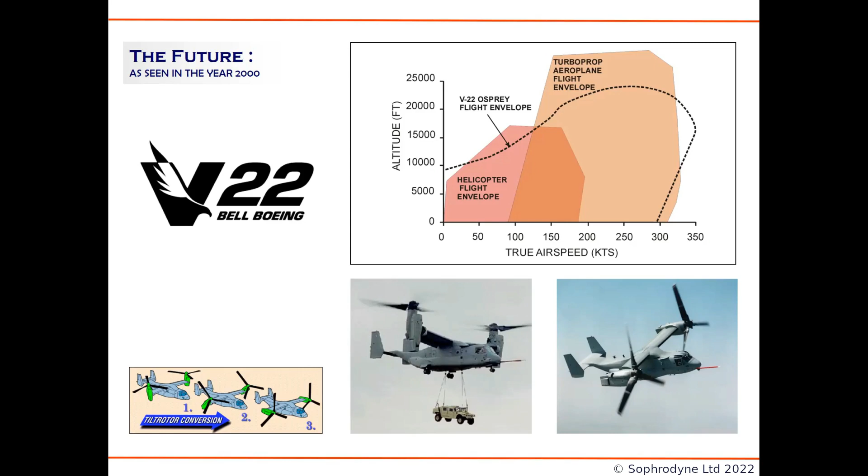Then in April 2000, on one very dark night near the small town of Marana in Arizona, 2 Marine Ospreys were simulating a tactical descent to a landing zone on the desert floor. There are several versions of what then happened. In one version, the pilot of the lead vehicle, realizing that his approach was too high, increased his descent rate beyond what had been trialed previously on the aircraft.

In another version of the same story, the pilot realized that he was going to overshoot the landing zone, and this is not a particularly uncommon phenomenon in night flying, especially with night vision goggles. He arrested the forward motion of the aircraft, unintentionally allowing its descent trajectory to become much steeper than he had intended. In any case, within seconds, the aircraft had flipped over on its back and crashed into the desert, killing all 19 Marines that happened to be on board that particular flight.

So within short order, an investigation panel was constituted to try to find out what had happened. This was not the first major accident that the V-22 had suffered, and speculation was rife within the rotorcraft community that this accident would be the final blow to the program.

The reason for this pessimistic outlook was that a rumor had begun to circulate that the aircraft was fatally beset by an old problem last encountered in the early days of helicopter flight, when most rotorcraft were smaller and lighter. This problem was thought to occur when the rotor of the helicopter would descend into its own wake, in the piloting parlance of the time, causing a catastrophic loss of thrust in a phenomenon called the Vortex Ring State.

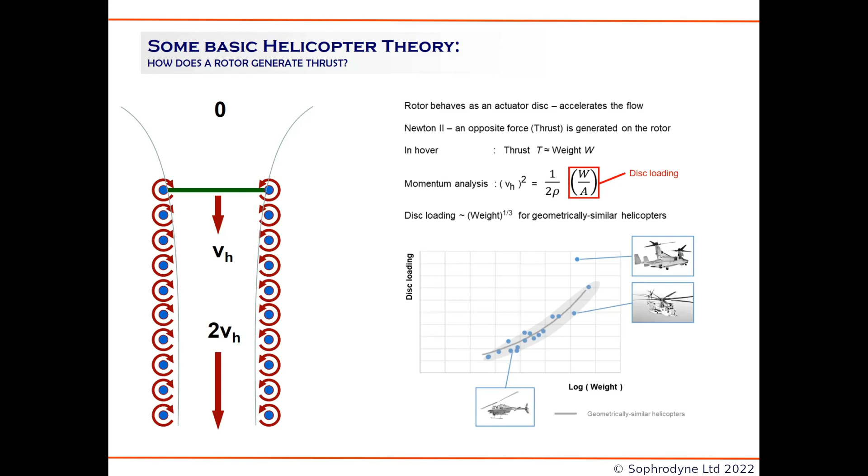Now you'll see something quite unusual already. Here's the V22, and here's where it sits on this graph. You can see that it's a heavy machine, but also that it has a disk loading that is rather high by conventional helicopter standards. So perhaps we can already see that there might have been something extraordinary about the V-22 that perhaps hadn't been quite appreciated during its original design when the aircraft's performance had been considered.

Another thing worth bringing to our attention, since I'll use this representation extensively, is how we represent a descending flight trajectory for a helicopter. This representation on the left perhaps seems the most intuitive: we plot altitude on the vertical axis and distance on the horizontal axis. The helicopter might start in steady level flight, before accelerating into descent, perhaps reaching a steady descent rate, then slowing down to a stop in hover before settling onto the ground.

For aerodynamic reasons, that's not a particularly effective way of representing a descending flight trajectory. We don't expect the physics of the vortex ring state to be much influenced by where the helicopter is in the sky, but rather by its speed relative to the air through which it is flying.

So instead we tend to represent a descending flight trajectory using this form on the right. To get from one representation to the other, we differentiate the aircraft's trajectory with respect to time, so rate of change of distance becomes the forward speed of the helicopter, and rate of change of altitude becomes the rate of descent of the aircraft. Then if I replot the blue trajectory on these new axes as the red curve over here...

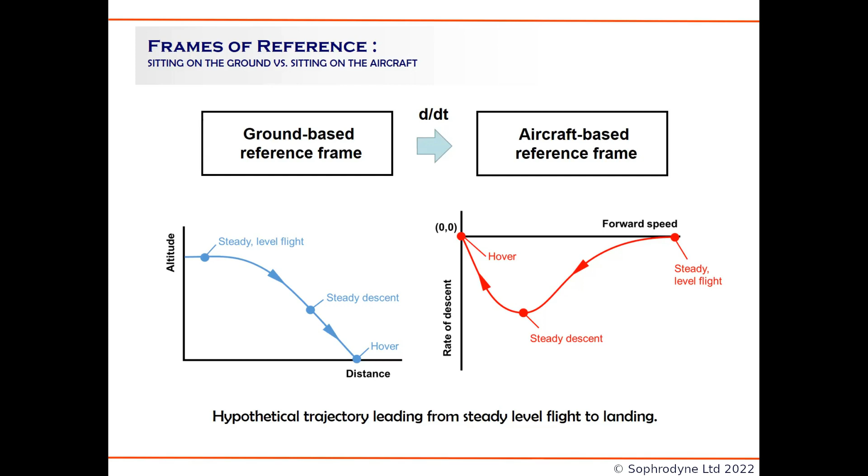You can see that we may start off in steady level flight on the horizontal axis. We'll accelerate into descent, reach a steady descent condition, and then decelerate back into hover. Hover, very conveniently, is the origin on this set of axes. Bear this representation in mind, because we will use it extensively in the slides to come.

So where are we going with all this? In the course of this presentation I'm hoping to do three different things. First, I'll talk about the vortex ring state as an operational issue, how the pilot actually experiences the phenomenon. Then I'm going to spend quite a bit of time talking about our theoretical understanding of the vortex ring state.

I'm going to show how the classical piloting description of the vortex ring state, as descending into the rotor wake, is deficient to the point of being wrong, and then proceed through a series of logical steps to introduce a more sophisticated view of the onset of the vortex ring state that is more consistent with the physics as we understand it. Using this more nuanced description, I'll then show the practical consequences for the next generation of rotorcraft, many of which have characteristics likely to make their behavior in the vortex ring state very similar to that of the V22.

So let me try to show you what the vortex ring state actually looks like from the pilot's perspective. Let's try to fly this trajectory: starting in steady level flight, accelerating into descent, trying to maintain a steady descent rate for a while, and then decelerating back into hover.

This video shows quite clearly what happens. Don't worry about the water spray added here to try to illustrate the behavior of the wake during the descent. That's not actually showing what the creators of the video would like us to believe it's showing, and is a bit of a red herring. What I'd like you to concentrate on is the trajectory of the aircraft as it descends along its flight path.

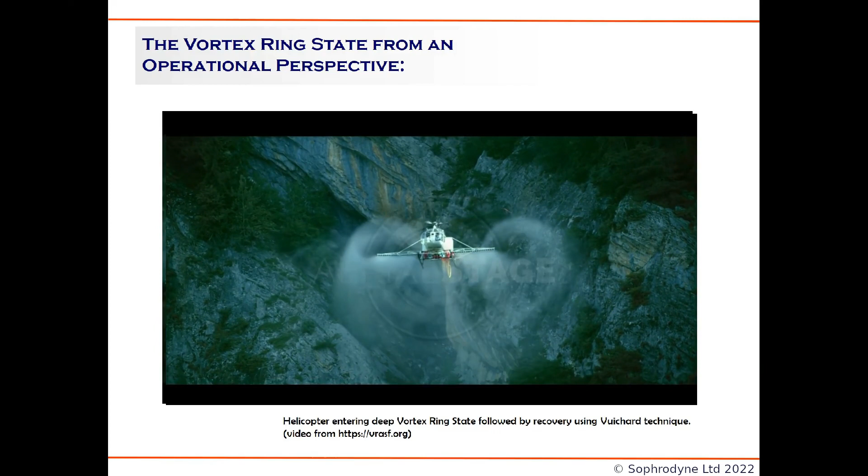Here we see the helicopter in steady level flight, more or less. The pilot puts it into a gentle descent and then starts to accelerate. At first the descent looks rather controlled, but soon matters get away from the pilot and the descent rate starts to look rather alarming. Eventually, the pilot takes corrective action and arrests the descent using a technique called the Vuichard maneuver, a very modern way of escaping vortex ring conditions.

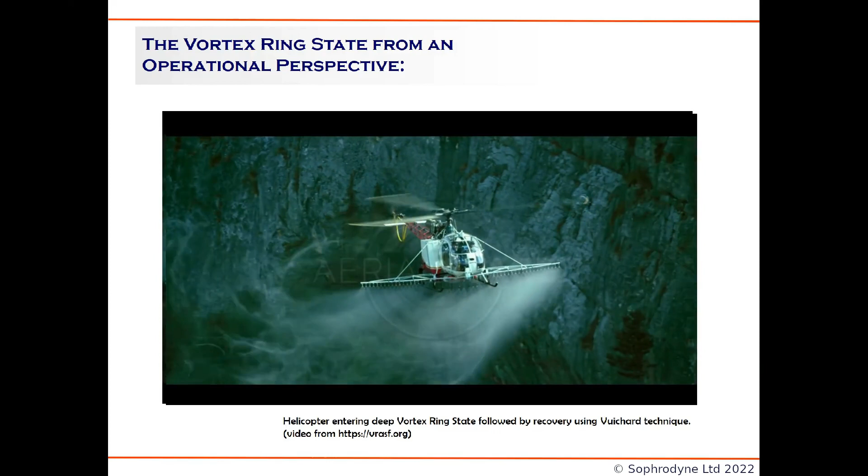The important thing to take away from this video is the very sudden increase in the descent rate that accompanies the onset of the vortex ring state.

I don't really want to present that sort of material here, but if you go to somewhere like YouTube, you'll find a handful of videos which show the helicopter not being able to escape the VRS before colliding with the ground, often with fatal consequences for the pilot and crew.

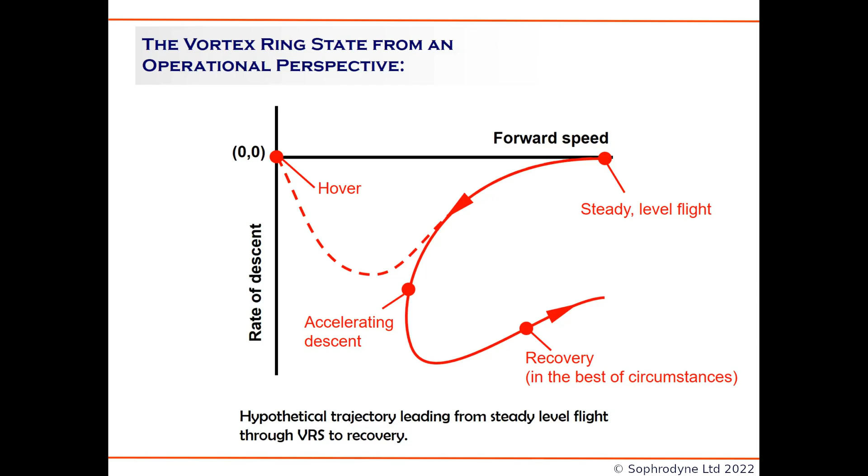So just to recap what happened in the video: the pilot was trying to fly this dotted trajectory, but what he ended up doing was flying this other trajectory, where at some point the descent rate started to increase, got away from the pilot for a while, until he managed to regain control and recover to some condition, perhaps with quite high forward speed or descent rate. This diagram shows the typical flight trajectory through the vortex ring state, where the pilot suddenly experiences this increase in descent rate that he wasn't anticipating.

Now, most of this presentation is going to be about what happens near this point over here. You can imagine that there might be a boundary somewhere here in the flight envelope that marks the onset of the vortex ring state.

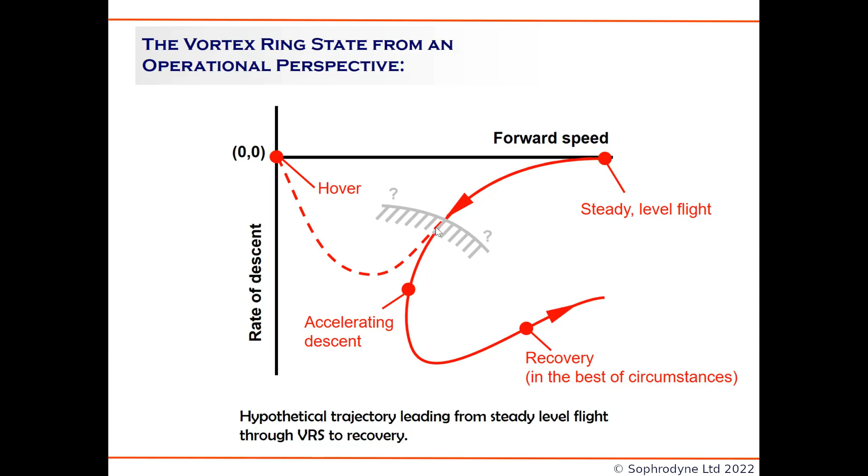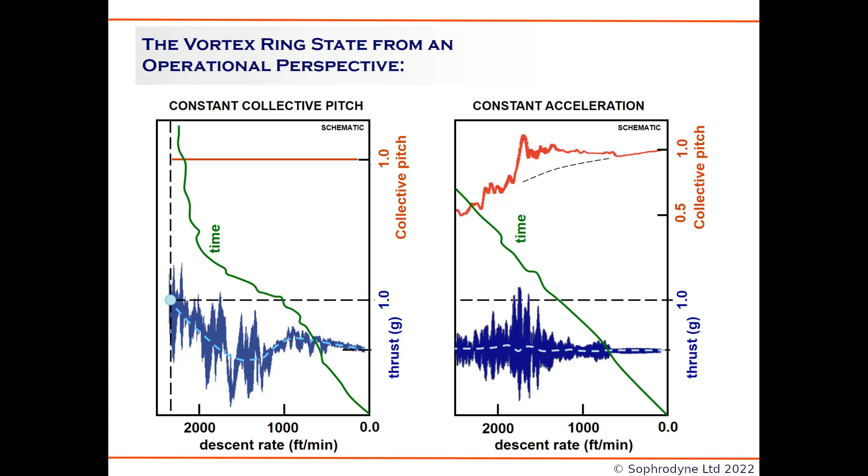What I've done in this figure is plot a pretty comprehensive range of the available experimental data showing where in the flight envelope, defined in terms of forward speed and rate of descent, these VRS-related thrust fluctuations are encountered. The experimental data goes all the way back to the 1940s, from the earliest flight test experiments through to the 1990s and Betzina's experiments on a model V22.

Now you'll see that something rather special is going on here. I'm not plotting forward speed and descent rate in conventional units, such as meters per second, knots, or feet per minute. Instead, I'm plotting the data on axes where forward speed and descent rate have both been non-dimensionalized.

by dividing through by the hover-induced velocity VH that I introduced on the second or third slide of this presentation. What becomes very apparent if we adopt this non-dimensional representation of the flight envelope is that all the data for the location of these VRS-related thrust fluctuations, independently of the experimental setup or the rotor involved, tends to cluster in the same part of the diagram. Now that's a crucial observation because it enables us to make an important theoretical advance.

In fact, this clustering of the data on the non-dimensionalized flight envelope suggests to us that the existence of the vortex ring state is a universal characteristic of all rotors. In other words, we won't find that some rotors are subject to one kind of vortex ring state and others to another kind, or not at all. Now let's try to formalize this.

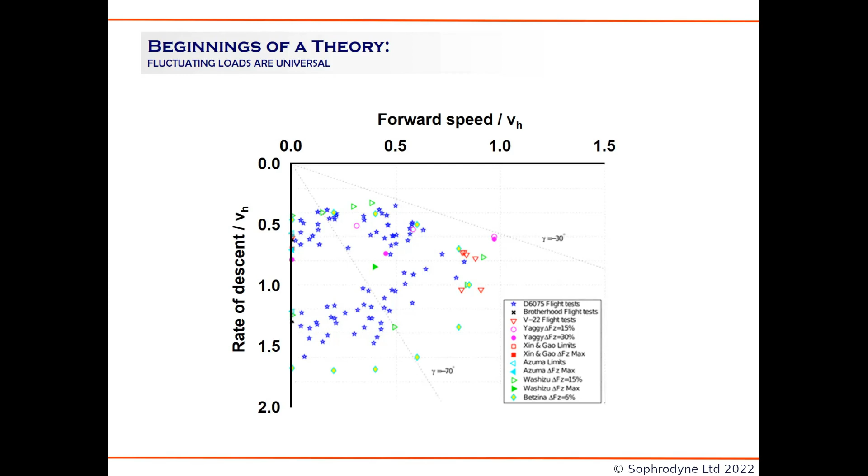Instead of presenting the VRS domain on this dimensional representation of the flight envelope, the data suggests that we should instead turn our attention to this non-dimensional representation, where we divide both forward speed and descent rate by the hover-induced velocity. Now here's where we exploit the equivalence between the hover-induced velocity and the disk loading that momentum theory gives us, which I introduced earlier in the presentation.

We can either non-dimensionalize using the hover-induced velocity or the square root of the disk loading. It doesn't matter, the result is the same. What this change of variables embodies, if you like, is the basic theoretical assumption that all rotors are subject to the same sort of vortex ring state, up to a scaling of the size of the region of the flight envelope affected by the VRS, by the hover-induced velocity, or equivalently by the square root of the disk loading.

If you accept the argument so far, then you realize also that details of the rotor design, parameters such as blade twist, blade tip shape, and perhaps the number of blades, must all have only a secondary influence on the character of the vortex ring state the rotor will be subjected to. So although we may need to consider the details of the rotor design to understand the subtleties of the VRS that a particular vehicle may encounter, this is secondary to the idea that the major characteristics of the VRS are determined principally by the disk loading of the rotor.

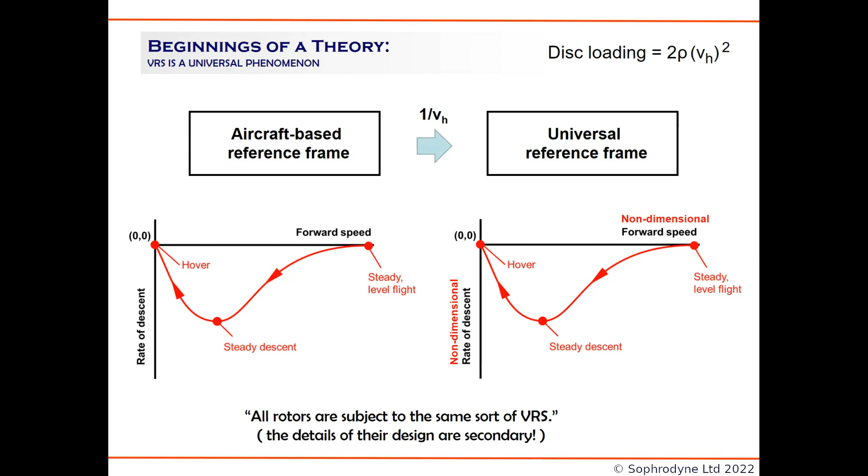Now, how is this used in practice? In terms of its operational relevance, this particular set of experimental data seems to have taken on a life of its own. In 1966, Washizu and Azuma at the University of Tokyo did experiments on a 1 meter diameter model rotor, and they mapped out comprehensively the region of the flight envelope subject to VRS-related thrust fluctuations. This figure shows their results presented as a contour map of the amplitude of the thrust fluctuations they were able to measure.

The data certainly supports the idea that the VRS is confined to a particular region of the flight envelope. Taking their results at face value, you might conclude that the vortex ring state will only be encountered if the helicopter is flying at a forward speed smaller than the hover-induced velocity and simultaneously descending at a rate somewhere between 0.5 and 1.5 times the hover-induced velocity. You can also see how those definitions may serve to give us our first rough and ready, crude and empirical definition of the VRS onset boundary.

Later on in this presentation, I'll show you that we can do very much better with a little theoretical input. Now, there is a danger in taking the arguments I've presented a little too far. For instance, Reynolds number effects may play quite a strong role in making the thrust fluctuations experienced by a model rotor a little more benign than is the case for a full-scale system. And certainly if you look in detail at the data I presented a slide ago, you'll see evidence of these second-order effects.

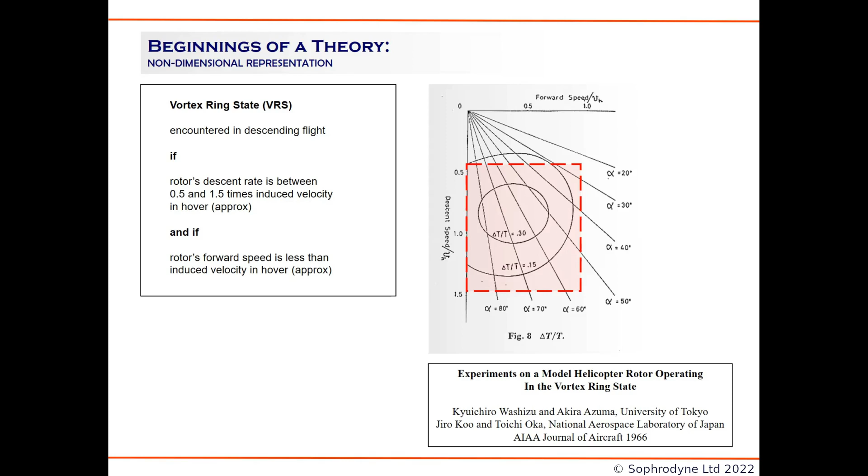The interesting thing is that Washizu and Azuma's data has propagated its way directly through into the flight manuals of many helicopters. If you're familiar with the flight manual of the CH-53E, you'll see a diagram which looks something like this. These contours, which demarcate the region of the flight envelope in which the aircraft might encounter the VRS, have more than a passing resemblance to Washizu and Azuma's curves. The important difference is that the units on the axes are real rather than non-dimensional. Washizu and Azuma's data has been scaled using the disk loading of the actual helicopter to give a diagram that is specific to the vehicle.

If you happen to be a US Navy pilot, the diagram will come with an additional boundary called the NATOPS boundary. You'll see this feature again when I present V22 data later in this presentation, and there'll be strict instructions not to fly below that NATOPS boundary. At low forward speed, flight is allowed in this low descent rate corridor. But as the forward speed increases, the corridor widens and the pilot is able to exploit a broader range of descent speeds.

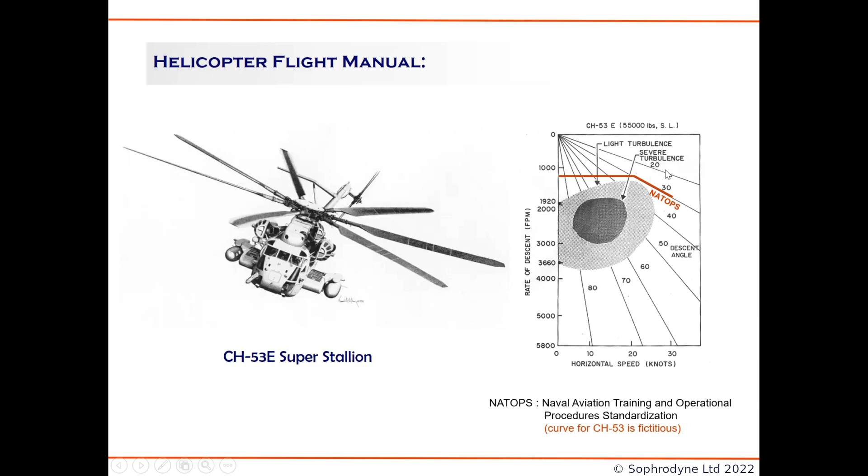Hence the persistent idea amongst some elements of the rotor community that the Vortex Ring State is not a particular problem for smaller aircraft. The data I'll present later in this presentation should dispel any complacency in this respect, however. It's the disk loading that matters, not the size or the weight of the vehicle. I'll return to this idea of universality of the Vortex Ring State later on in this presentation.

But for the moment, let's change direction a little.

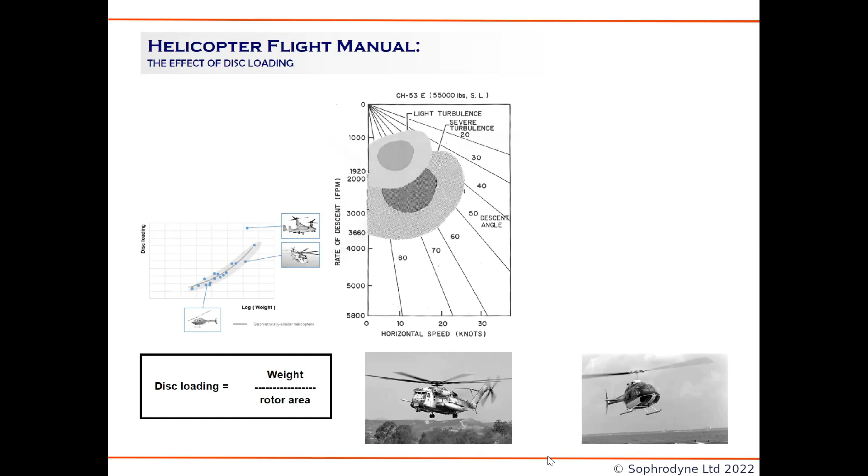Up to now, I've been talking quite extensively about the Vortex Ring State from an operational perspective. I've tried to give you a qualitative understanding of what the VRS looks like from the piloting point of view, and I've also shown you how the possibility of encountering the VRS might be represented within the flight manual of a particular helicopter. I've also begun to expose some quantitative aspects of the phenomenon, for instance, in terms of its dependence on the disc loading and its existence over a bounded range of flight speeds and descent rates. But the arguments so far have been largely heuristic and based on an analysis of experimental data. So in the next section of this presentation, I'd like to develop our theoretical understanding of the fluid mechanics that underlies the Vortex Ring State.

Now, let's say that we want to try to predict the thrust that is produced by the rotor when operating within the Vortex Ring State. Let's try to do that by going back to our original approach, where we related the acceleration of the flow through the rotor to the force that it produced. We can quite easily extend the analysis to the situation where the flow away from the rotor is not at rest, obtain a result for the induced velocity of the rotor, then use this to calculate the thrust.

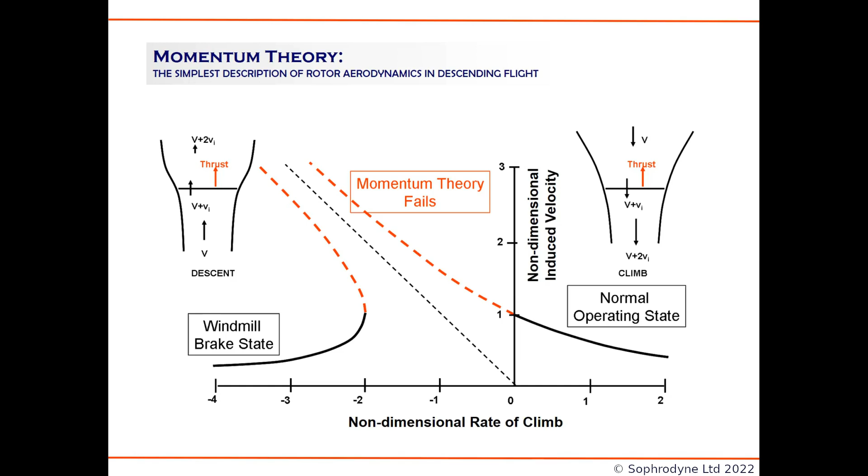So let's go back to experiment. Some very careful data gathering shows us that the mean thrust that the rotor generates when operating within the vortex ring state does seem to follow a consistent and repeatable relationship to the descent rate of the helicopter. Given what I've said so far about thrust fluctuations and the associated unsteadiness of the loads on the aircraft within the vortex ring state, this order within the chaos may come as a bit of a surprise.

What this suggests, of course, is that we should be able to find a deterministic, well-behaved relationship between the induced velocity and the descent rate of the helicopter that applies within the vortex ring state.

Now, this sort of result is again crucial because it shows us where we should perhaps focus our attention in trying to understand the physics of the vortex ring state. And up to this point, of course, I've not really said very much about the rotor wake, except perhaps for a few rather indirect references. It's time to rectify that.

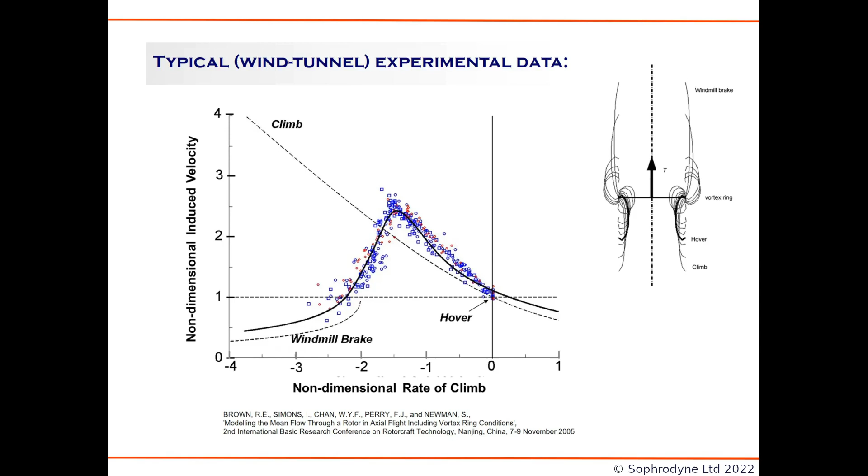Now, as the helicopter moves through the air, and because of the flow that is induced through the rotor by these vortices themselves, these tip vortices convect away from the rotor to form these essentially helical or spiral patterns in the air.

With the helicopter in forward flight, the mutual interference of these vortices can lead to a very complex but still inherently spiral wake structure. I'll say a lot more about this mutual interference between the vortices later.

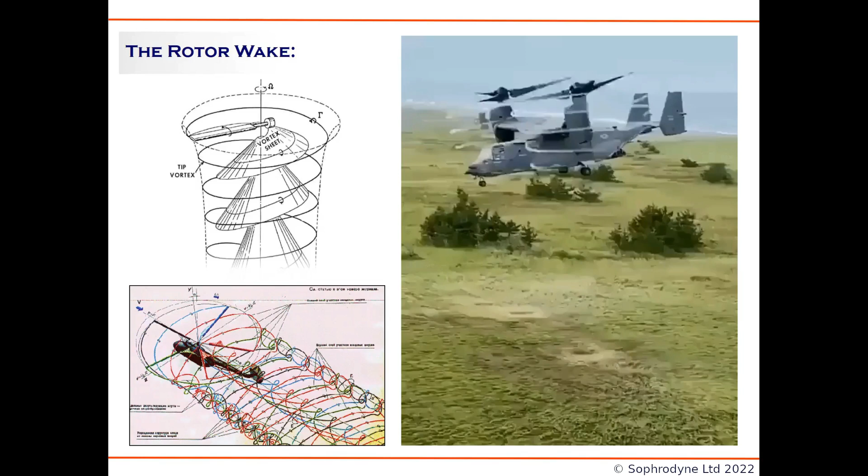Now, in terms of the influence of these vortices on the rotor, it's useful to think of them as the location of extremely intense and localized swirling motions within the airflow. So if the vortices get close to the rotor, their influence on the aerodynamics and the loads produced on the rotor blades becomes more pronounced.

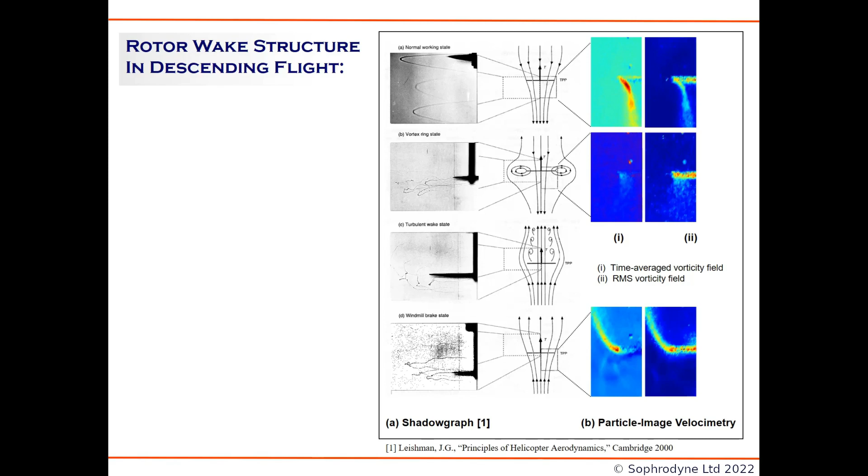Now, if you go to your average helicopter flight school, you'll very likely be given quite a simple explanation for why the VRS comes about. The usual way of describing things is that VRS occurs because the helicopter rotor descends into its own wake. In the next few slides, I'll try to put this explanation on a theoretical footing, but then I'll also show that in the light of available data, this idea is too simple, perhaps simplistic even.

Okay, so how does this simple explanation work in terms of the wake dynamics? Let's adopt yet another way of looking at the dynamics of the vehicle, this time together with the dynamics of the individual vortices within the rotor wake.

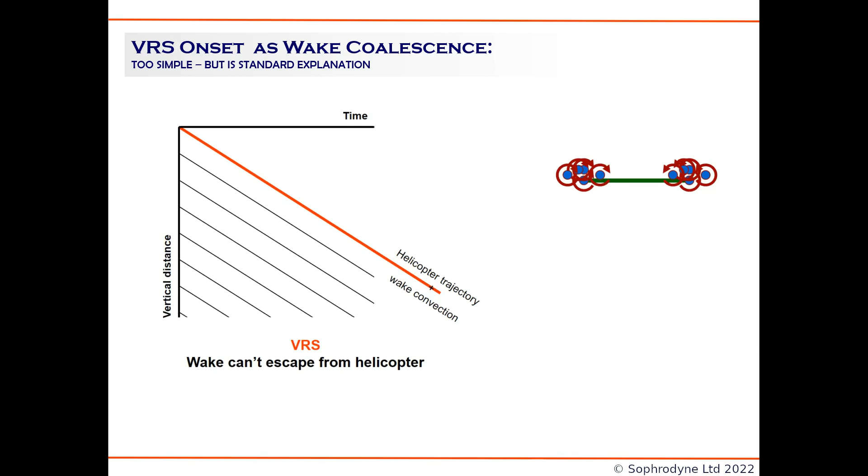So here we have the standard explanation of the origin of the vortex ring state. The helicopter descends into its own wake, and the effect of this vortex bundle is to destroy the ability of the rotor to generate appreciable thrust. Highly compelling, but unsubtle and not really supported by detailed analysis, as I'll shortly show.

So what happens if we increase the descent rate of the vehicle further, as I've shown in this diagram? Well, then the rotor can leave these vortices behind in the flow again, and the helicopter can escape its own wake, so to speak, and the rotor's encounter with the vortex ring state comes to an end.

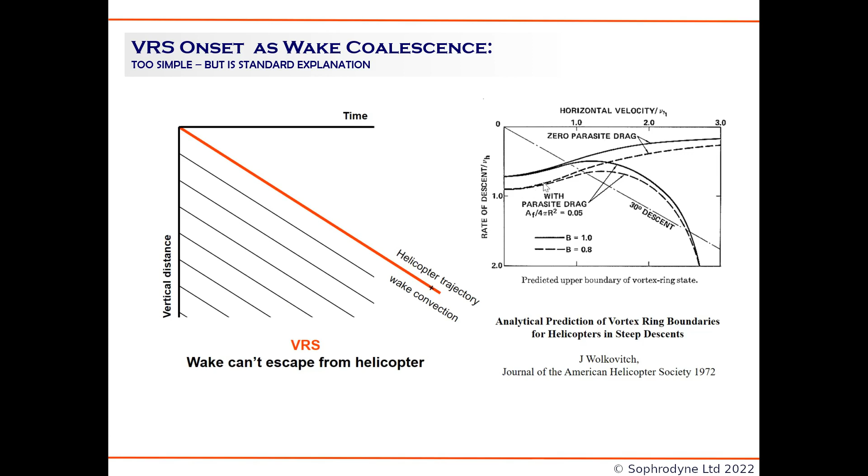Now, the interesting thing is that you can actually develop an analytical model for the location of the VRS onset boundary on the flight envelope based on this conception of the dynamics of the rotor wake. That was done by Wolkovitch in 1972. The diagram at right shows the location of his onset boundary on axes of non-dimensionalized forward speed and descent rate. According to his model, the rotor would enter the VRS if it crossed this lobe-shaped boundary in the flight envelope.

Now, if we compare Wolkovitch's model's predictions against the experimental data, using Washizu and Azuma's measurements of the thrust fluctuations experienced by the rotor when in the VRS, then we can see that there's potentially a serious problem.

Wolkovitch's model predicts VRS onset occurs at a descent rate that is about equal to the hover-induced velocity, whereas the data suggests that VRS onset occurs at much lower descent rates, around about 0.5 times the hover-induced velocity.

Wolkovitch also had significant problems explaining why the VRS didn't persist when the forward speed of the helicopter was increased beyond VH, and had to resort to a very obscure explanation in terms of the parasite drag on the rotor.

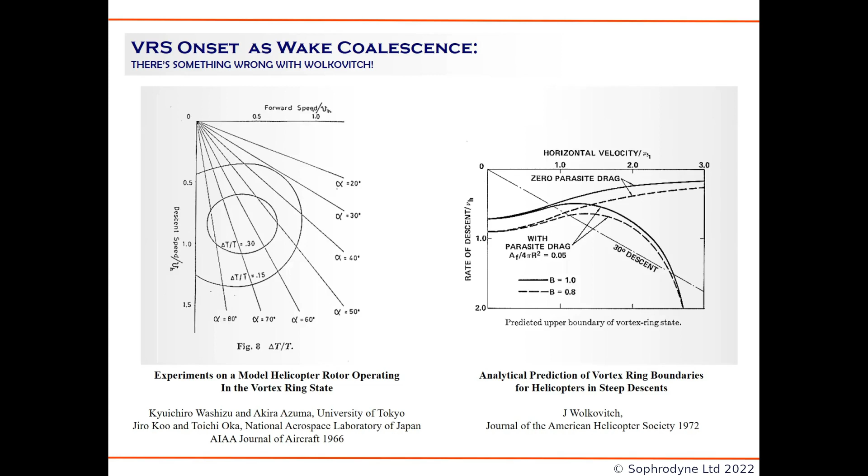So this is where John Perry made a really big insight. What he postulated is that the induced velocity created by the rotor in its wake is actually not as effective as we think, given this very simple convection model.

And what he was able to do was come up with a very simple analytical expression, which I've written down here, to define the location of the VRS boundary within the flight envelope of the helicopter. Mu-x is the non-dimensional forward speed of the helicopter, and mu-z is its non-dimensional descent rate.

Those of you who remember some of your high school mathematics might recognize the form of this expression as being very similar to that of an ellipse. R squared is equal to a x squared plus b y squared, in other words.

And indeed, John's expression defines a distorted, elliptical-shaped lobe within the flight envelope that marks the onset boundary for the VRS. This elliptical shape has just two parameters, but captures very well the region of the flight envelope in which Washizu and Azuma's data suggest that the rotor might encounter the VRS.

The first parameter, mu-w, John postulated, was a critical rate of transport at which the wake would collapse out of its coherent state to yield the vortex ring state.

And the parameter k was introduced in the realization that the mechanisms governing transport of the wake down away from the rotor might yield a different wake transport velocity than those mechanisms that govern transport parallel to the rotor disk.

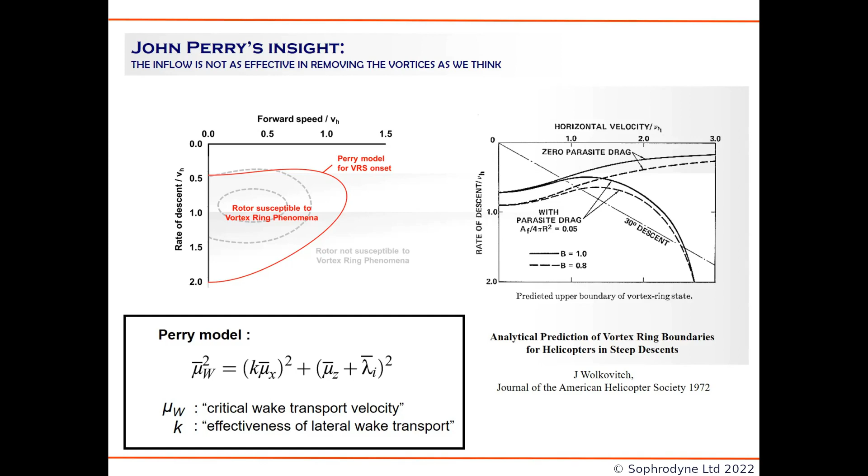Well, one way is to investigate the wake dynamics in more detail using computational simulations of the underlying fluid mechanics. Now, modeling the dynamics of individual vortices in the wake of a helicopter rotor is an extremely exacting task.

Now, you might think that the standard recourse would be to some sort of computational fluid mechanics. But the problem with most CFD methodologies is that they tend to dissipate and lose sight of the very vortical structures that are of most interest in understanding the VRS.

At the time, my research group was developing a new computational approach to rotor wake modeling called the vorticity transport model, which was designed from the outset to avoid these problems. As it turned out, the VTM was able to represent the dynamics of the wake very accurately and efficiently, especially in these taxing problems where many rotor revolutions were required to capture the inherent properties of the VRS.

This video shows the approach being used to model the aerodynamics of a modern tilt-rotor vehicle in forward flight. You can see for yourself how the specialized methodology is able to capture the dynamics of the helical vortices all the way from their inception at the rotor blade tips, maintaining their integrity and coherence way back to many rotor revolutions behind the aircraft.

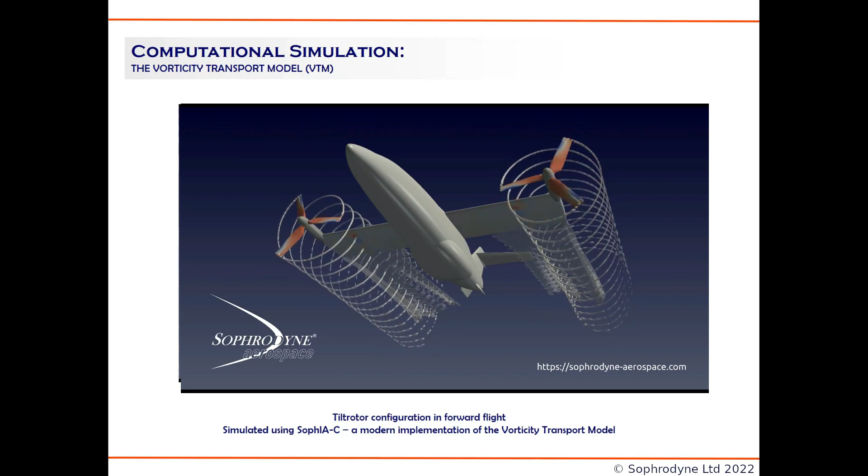So what we could do with the VTM is fly a model of the helicopter rotor in a vertical descent. In these initial exploratory runs, the trajectory followed by the helicopter was not very important. We could do something very simple, like starting from a very high descent rate and forward speed outside of the vortex ring regime, then slowly decelerating the aircraft and reducing its descent rate until we ended up deep within the vortex ring state.

So let's see what happens if we simulate this trajectory using the vorticity transport model.

Okay, so what we're trying to do here is take an initial peek into the dynamics of the rotor wake as the helicopter decelerates from a high-speed descent into the vortex ring state.

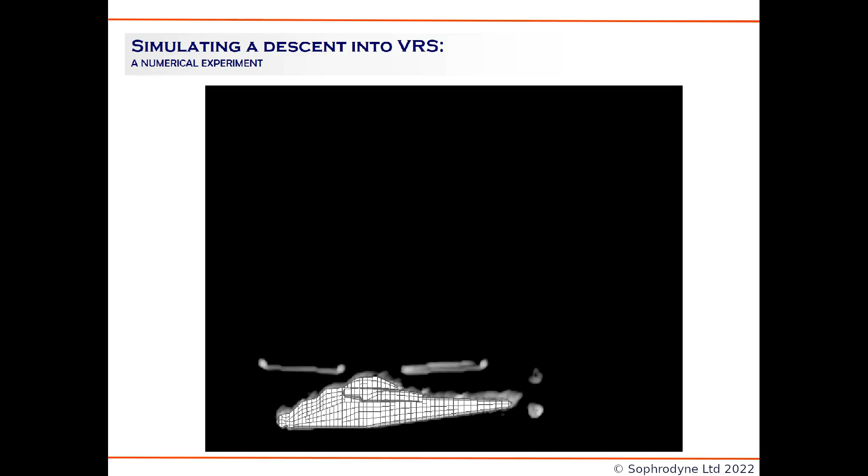So first we start the simulation and allow sufficient time for the wake to build up with the helicopter in rapid descent. I'm plotting the wake vorticity on a cut through the plane of lateral symmetry of the aircraft, and you can see the individual tip vortices from the main rotor, as well as the vorticity from the fuselage wake and that generated by the tail rotor.

The first important observation is that at this very high descent rate, the structure of the main rotor wake is very coherent indeed. All the individual tip vortices are visible, and the spacing between them is very even.

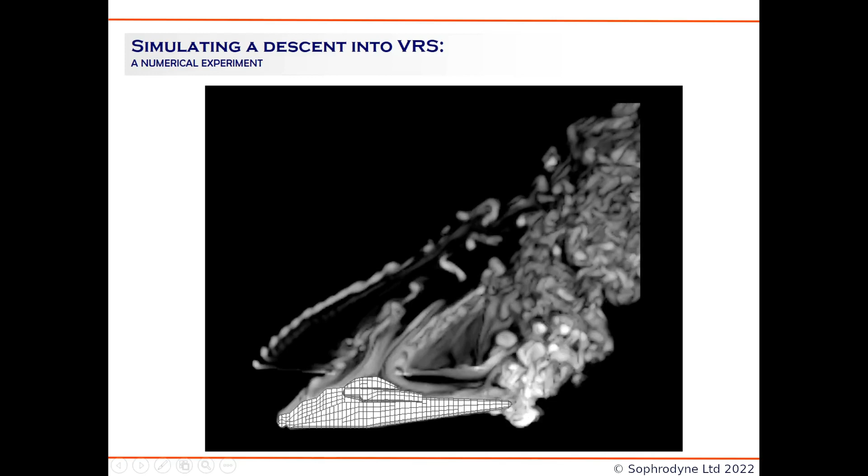But watch what happens now as the rate of descent of the aircraft slowly decreases. Look over here, something very interesting is about to happen. The wake is losing its coherence, starting from far downstream of the rotor and moving incrementally downwards towards the rotor as the descent rate decreases.

And you can see that it's not that the individual wake vortices are bundling up as per the classical explanation. They're actually being disrupted and turned into highly disordered vortical mush. The vortices are being changed entirely in character by this physics going on in the wake.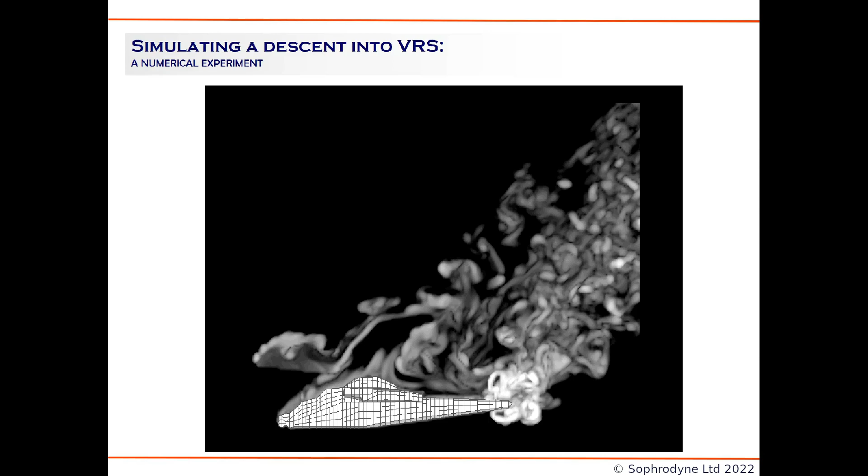All the vorticity is still there. Look, you can see it streaming up the middle of the wake, but it has a very different character to the tip vortices that the rotor originally created. Once we're down in deep vortex ring conditions, there's no real sign of the coherent bundled set of vortices that we might have imagined from the classical description of the vortex ring state. The whole vortex system has been torn up, disordered, and ejected out of the center of the rotor disc.

So what's going on? Simulations such as this show very clearly that the physics that governs the onset of the vortex ring state is a lot more complex than we might have imagined.

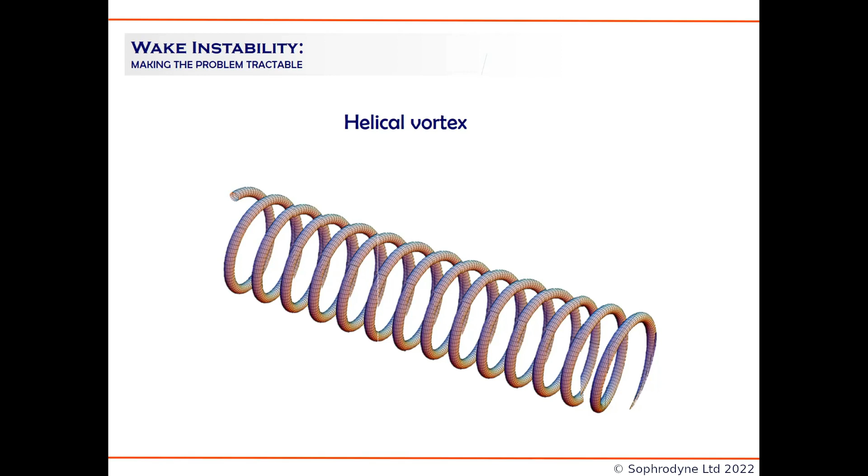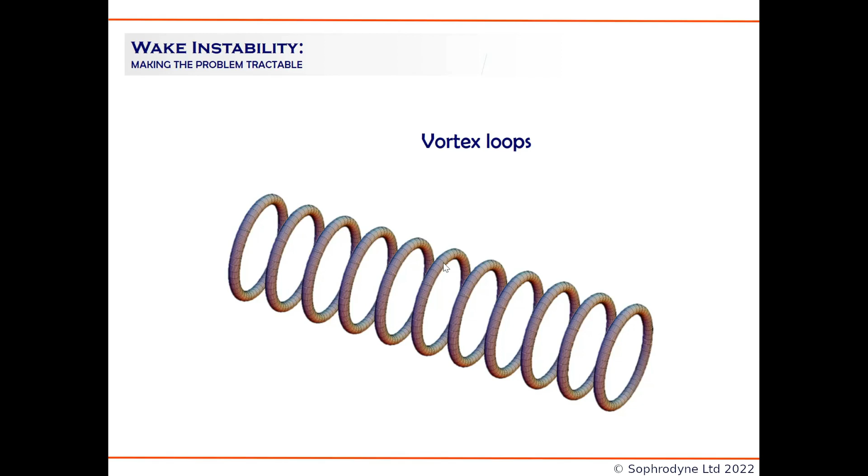and then apply our understanding to the dynamics of the wake as the rotor enters the vortex ring state. Let's first make a few simplifying assumptions so the problem becomes tractable enough to analyze. We know the wake consists of vortex structures that are helical in shape, but let's first approximate the topology of the wake and instead represent the sequence of vortex filaments as a series of ring-like vortex loops. Then let's analyze the behavior of one of these vortex loops on its own.

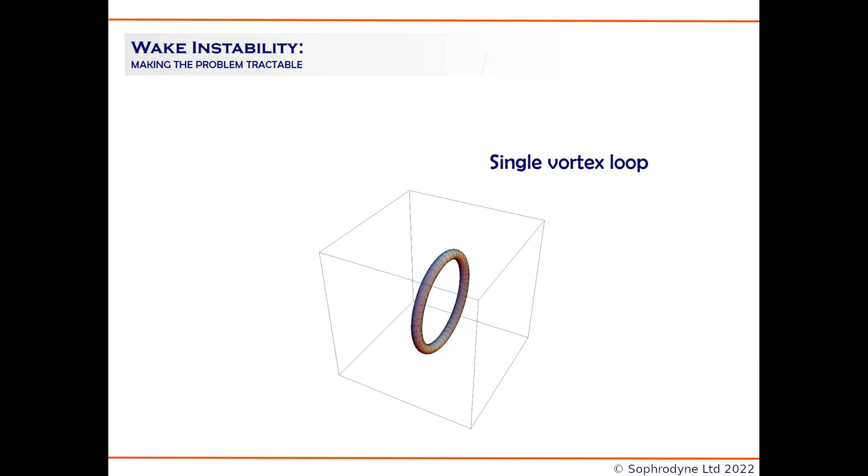There are two important modes of instability we need to consider. The first mode is called the short wavelength instability. If we take this vortex loop and perturb it slightly by adding a few wrinkles, the vortex responds by deforming and crinkling, as shown in this animation.

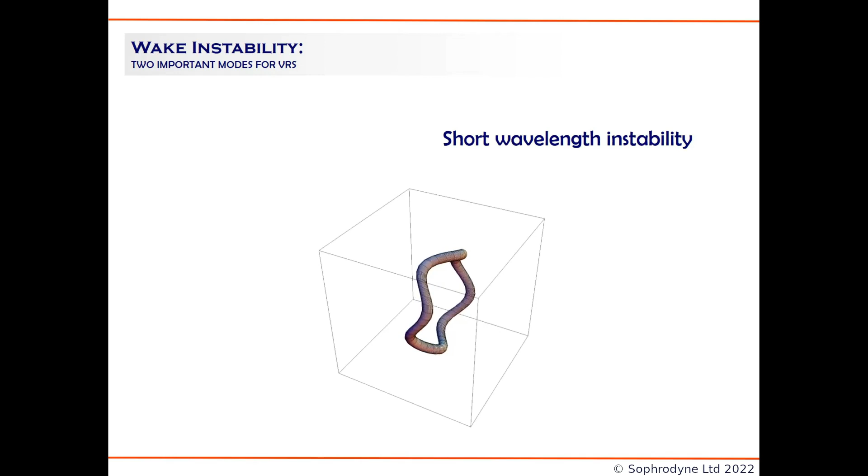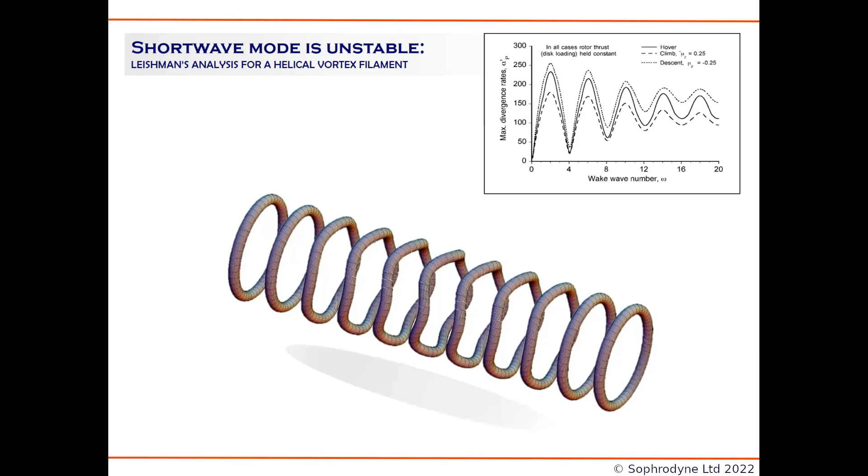If we represent the wake by a sequence of vortex loops and then perturb one of the loops, something very interesting happens. The deformation of the loop I originally perturbed continues to grow as a result of a process called self-induction. But because of the mutual interaction between the loops, the instability also spreads out along the loops as time advances. You can see that the spreading takes place in both directions from the location of the original perturbation. This observation is crucial for a more nuanced view of vortex ring onset.

In other words, the products of the instability of the rotor wake filaments travel out at a different speed to the speed of the vortex filaments themselves. You can see from this simple representation that the shortwave instability is capable of creating extensive disorder within the wake. Indeed, further theoretical work shows that this disorder can be created within very short timescales, over the course of just a few rotor revolutions for the biggest disturbances.

Now we need to ask ourselves another question. How are the initial perturbations created that then allow the short wavelength mode to create such disorder in the wake? Well, that's the work of another instability resulting from the pairwise interaction between neighboring vortex loops.

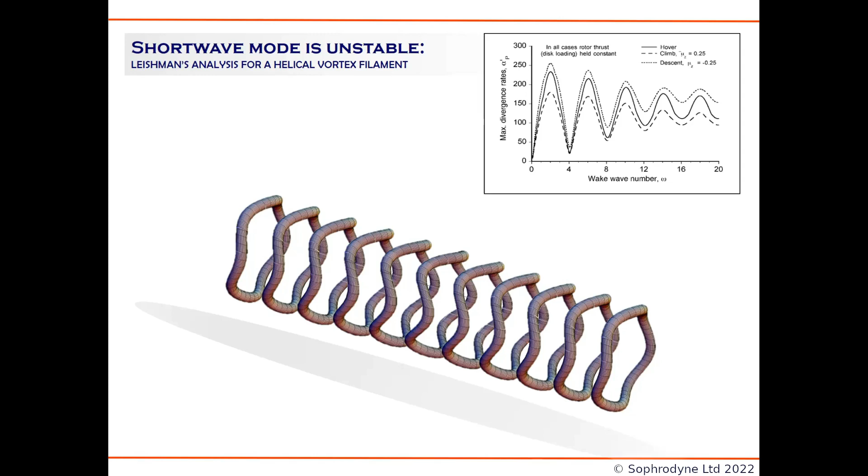If we look at the dynamics of two isolated vortex loops, they propagate through the flow by effectively swapping position, as shown in this animation. The mutual interference causes the leading vortex to expand and the trailing vortex to shrink. The leading vortex then pulls the trailing vortex through to the front in this leapfrogging type motion.

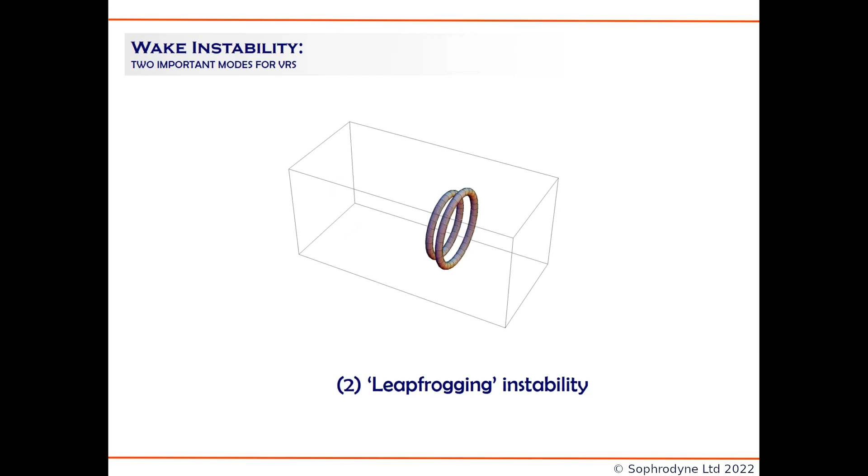Now, if we consider the leapfrogging mode applied to the vortex wake, we can't neglect the helical nature of the vortex filaments. The fact that the loops of the wake are interconnected to form a helix poses what's called a topological constraint on the dynamics of the system. The helical form of the filaments prevents the loops from exchanging position and instead causes any leapfrogging motion to just tangle the vortex filament, as shown in this animation.

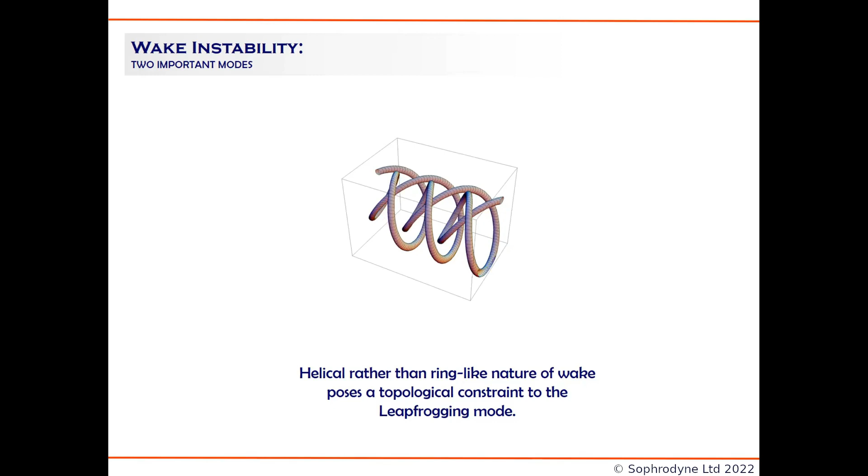Now, if you think this is all a bit theoretical, there's some really fantastic water channel visualization that's been done of the evolution of a helical vortex. Have a look at this. It's quite beautiful in terms of the quality of the experimental data, and you can see this leapfrogging mode in action, as well as its effect in tangling up the vortex filaments.

So in summary, the leapfrogging mode is capable of causing very large local perturbations to the structure of the wake. And then the short wavelength mode can take over to complete the destruction of any coherence and order in the vortex filaments that might remain.

Now let's do a simple numerical calculation that shows the combined effects of leapfrogging and the short wavelength instability. Unlike the previous calculations I've shown you, this calculation is for a system that has been pared back to reveal just the essential physics. Often I think numerical practitioners forget the value in being able to do this sort of thing. One doesn't have to represent the physical world in all its detail to learn something about the system. And indeed, this approach often obscures true understanding.

So here we instead model the wake dynamics of a simplified rotor, which only generates one single helical tip vortex filament. You can see that for the first few revolutions below the rotor, the tip vortex remains relatively coherent and maintains its helical shape. As I step through the simulation, though, you'll see a series of leapfrogging events taking place just a little further down in the wake.

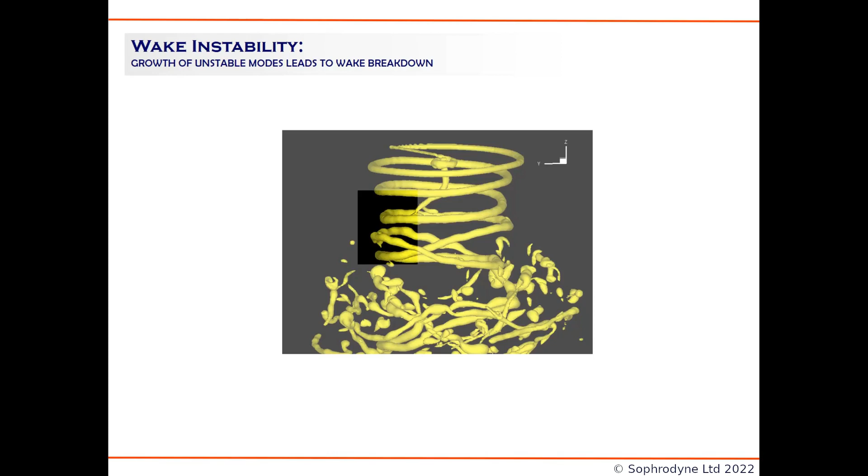Now we can use our understanding of the dynamics of the wake in the presence of these instabilities to produce a rather more sophisticated and nuanced model for the onset of the vortex ring state than the classical convection-based approach gives us.

In the classical case, we'd conclude that the rotor was descending too slowly for it to be subject to the vortex ring state.

Let's then enhance this model by adding in the effects of vortex instability. We know that the disturbances to the wake that result from its instability grow in strength as time progresses, but then dissipate as the vortex filaments disintegrate and disperse some distance below the rotor.

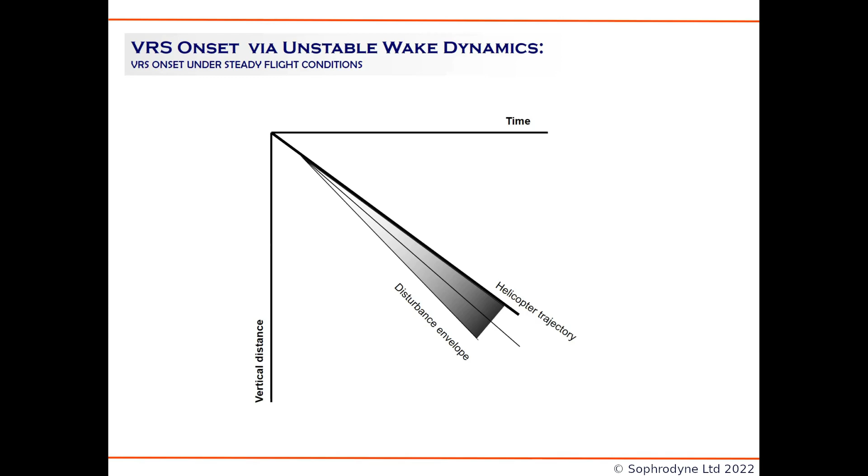What this allows us to do is to create a very powerful model for the location of the region of the flight envelope that is affected by the VRS, that applies not only under steady flight conditions, but also is able to predict the effects of acceleration and maneuvers on the onset of the vortex ring state.

Mu(x) and mu(z) are the non-dimensionalized forward speed and descent rate of the system, and ud and wd are the horizontal and vertical rates of propagation of the vortical disturbances into the wake. Finally, cd is the rate of growth of the disturbances.

To make the model practically useful, of course, we need to model the dependence of ud, wd, and cd on the dynamics of the vehicle.

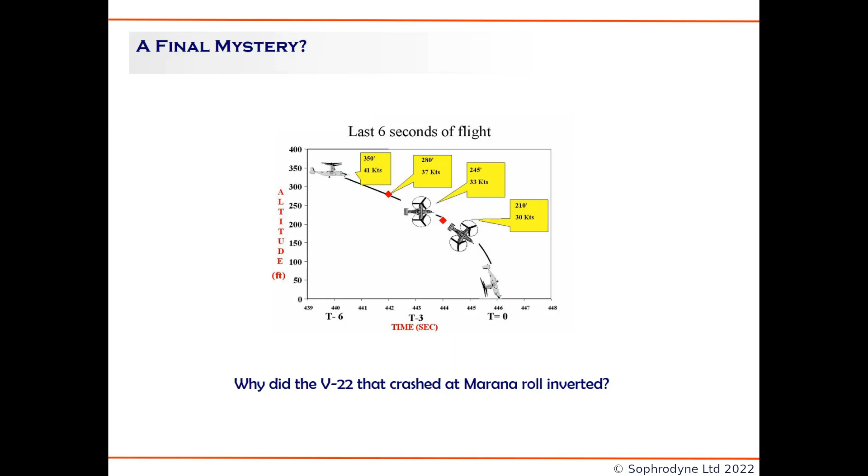Well, it turns out that there's likely a problem with aircraft that have widely separated rotors when it comes to the vortex ring state. The velocity at the rotor is what is important for the onset of the vortex ring, and not the velocity of the aircraft itself.

So if the aircraft has appreciable roll rate, for instance, then the velocity at rotors located near the wingtips may be appreciably different from one side of the aircraft to the other, and of course possibly very different to the velocity measured by the flight measurement system of the aircraft itself.

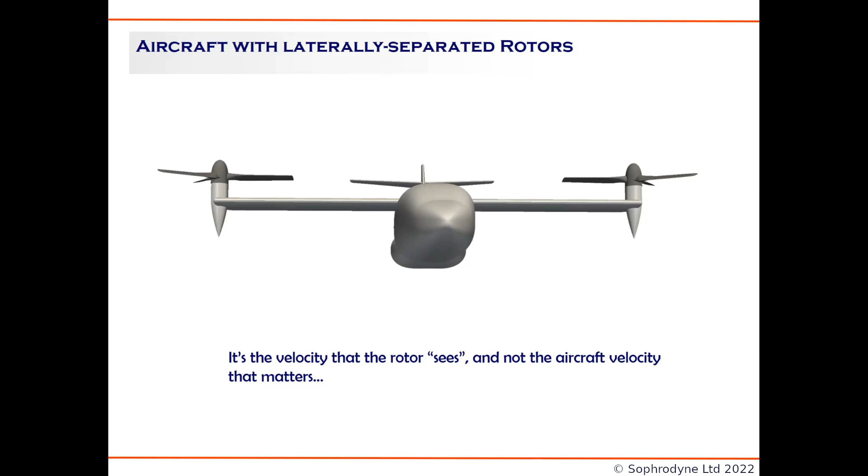But there's this interesting third alternative in the middle, where perhaps because of the roll rate on the aircraft, the port rotor doesn't encounter the vortex ring state, but the starboard rotor does. In which case, if the aircraft's control system is not properly set up to cope with this sort of dissymmetry...

One might end up exacerbating the vortex ring state to the extent that the thrust falls away on the starboard rotor in this particular example, and the aircraft ends up encountering a very high roll moment, which could turn the aircraft upside down and lead to the kind of accident that happened at Marana in 2000.

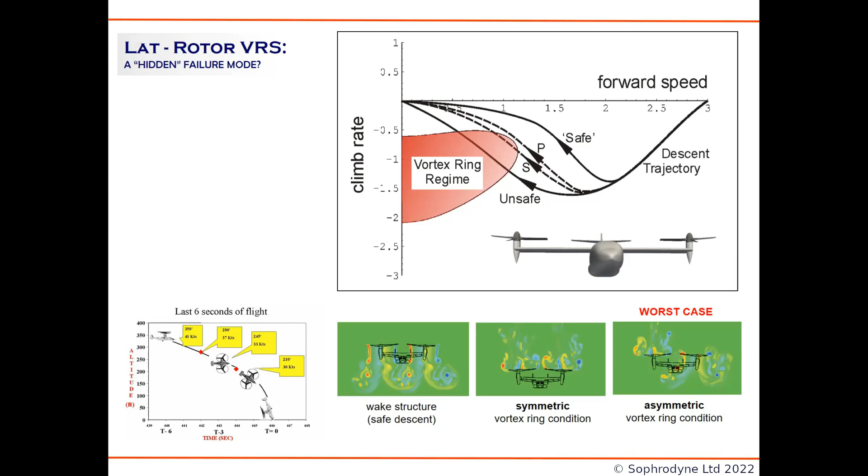In the final part of this presentation, I'd like to look at some of the practical applications of this model for the onset of the vortex ring state. I'd like to concentrate specifically on its implications for the next generation of rotorcraft that are just leaving the drawing boards, or these days the CAD systems at various companies, as we see what can only be described as a boom in interest in vertical takeoff and landing systems for various real-world applications.

First, let's recap some of the salient analysis. I spent quite some time earlier explaining the importance of disk loading on the size of the region of the descending flight envelope in which the rotorcraft would potentially be subject to vortex ring conditions. The disk loading is the weight of the aircraft divided by its rotor area.

Earlier, I showed the relative size of the VRS regime for two helicopters with very different size and weight by scaling the entries in their flight manuals. Using our model, we can now do that analytically.

So here I compare the size of the affected regions of the flight envelope of the Robinson R-22, a lightweight training helicopter, with that of the heavyweight V-22 military tilt-rotor.

In generating this figure, I've simply plugged the relevant disk loading into the analytic model to generate the boundary of the VRS onset regime. From this diagram, you can understand where the popular belief might have come from that for small rotorcraft, the VRS is confined to such a small region of the flight envelope as not to be a very important consideration for the safety of the vehicle.

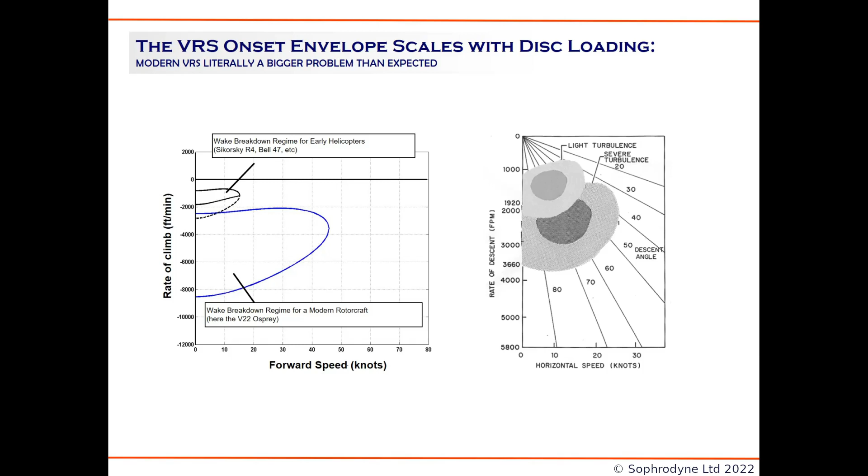The V22, which we know is an outlier, experiences the VRS for descent rates between about 2,000 and 8,000 feet per minute, and only when the aircraft is flying at forward speeds less than about 45 knots.

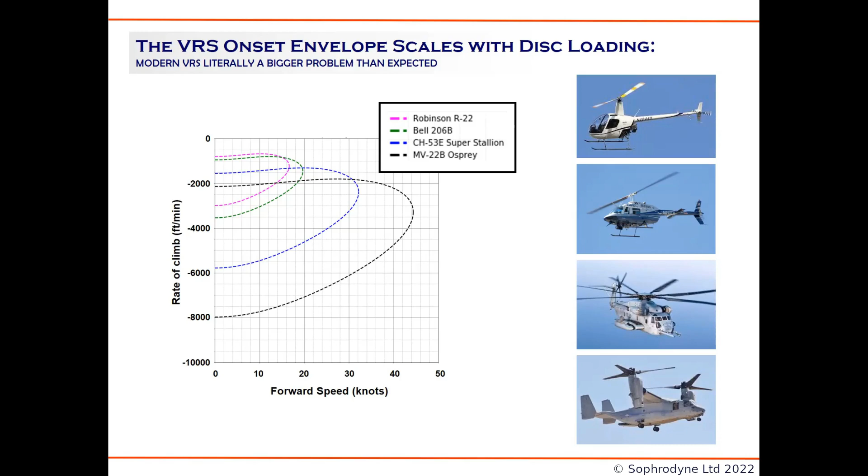Now, how are these new aircraft likely to be influenced by the Vortex Ring State? Well, in an earlier slide, I suggested that the disk loading obeys a very simple scaling law: it increases as the cube root of the weight of the aircraft.

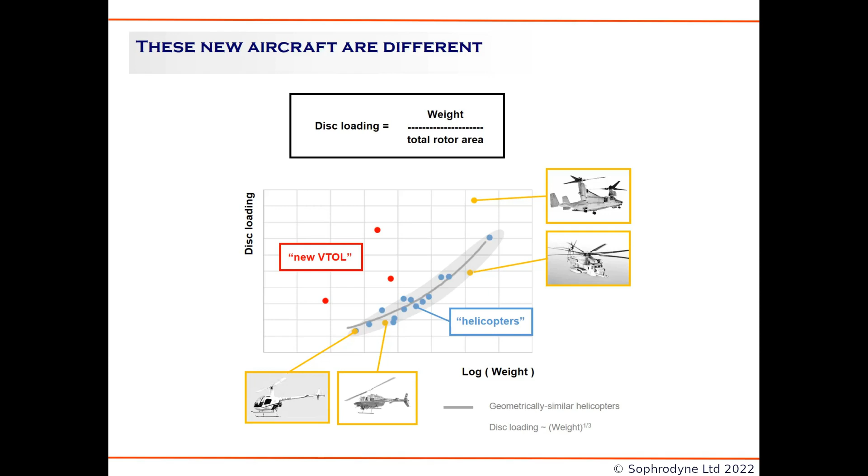Now, there may be very good reasons for this, for example to balance the efficiency of the rotors when operating in forward flight with their lifting ability in hover. But let's stop to consider for a moment the likely impact of the shift towards higher disk loading on the likely behavior of these vehicles when in descending flight. And this diagram, I think, makes the point.

Finally, many of these new vehicles exploit the distributed propulsion concept to some extent, often having multiple side-by-side rotors. The effects of roll, pitch, and yaw rates in inducing asymmetric VRS, perhaps exacerbated by the mutual interaction between the wakes of the various rotors, needs to be borne in mind also when designing the vehicle to be safe and robust to environmental effects.

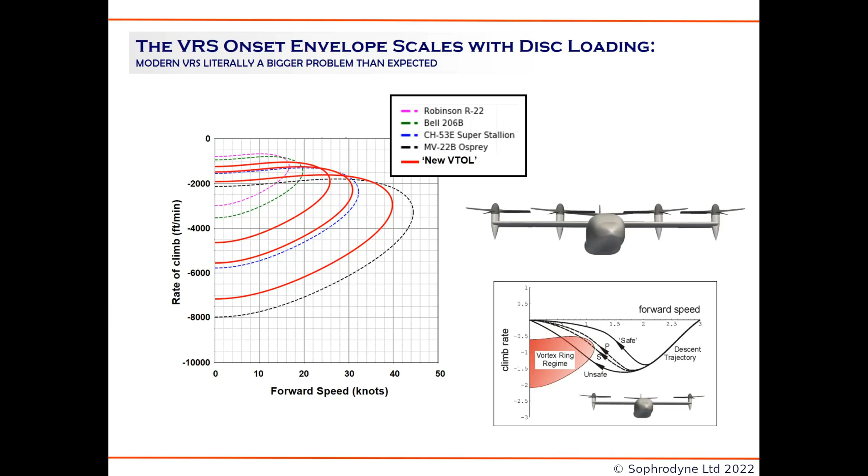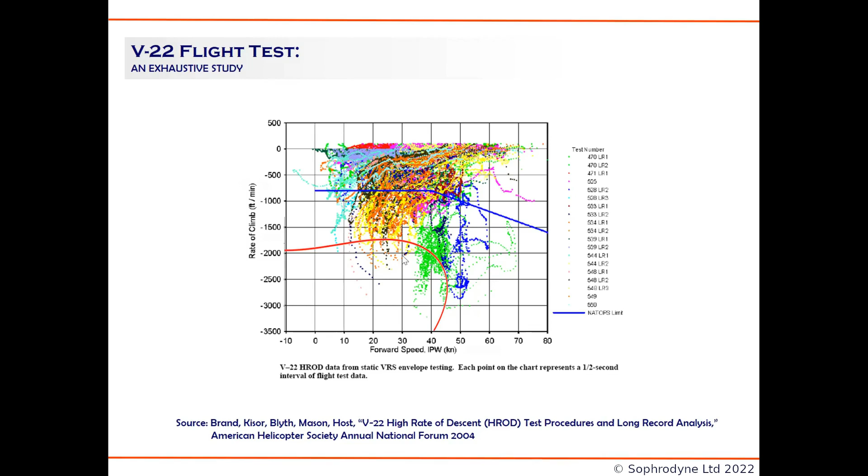Suffice it to say that an extensive test flight program was conducted to map out the flight dynamic characteristics of the vehicle in descending flight. Most of the effort was concentrated above the NATOPS boundary to make sure that part of the flight envelope was free of surprises. But several flights penetrated down through the VRS onset boundary proper.

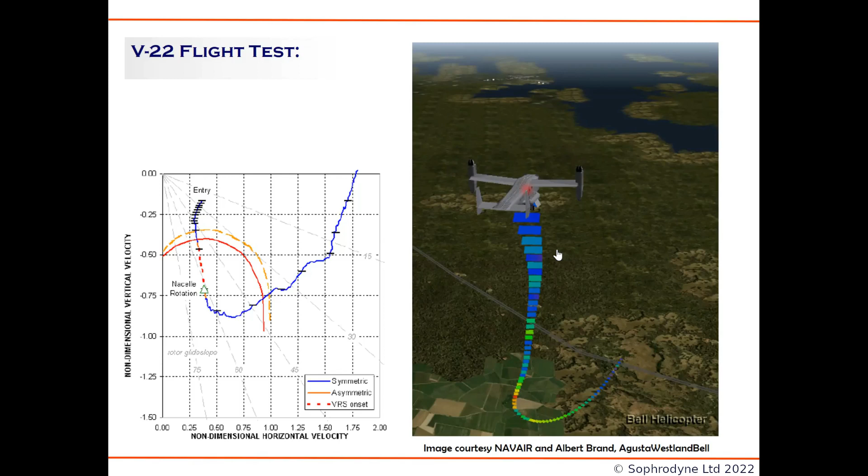I'll not have the time to discuss the experimental record in detail, but some salient points are definitely worth highlighting. Firstly, the record of the airspeed for the aircraft. Obviously, accurate measurement of the aircraft's speed through the air is vital if the pilot is to have an accurate conception of where his aircraft is on the flight envelope relative to the VRS onset boundary.

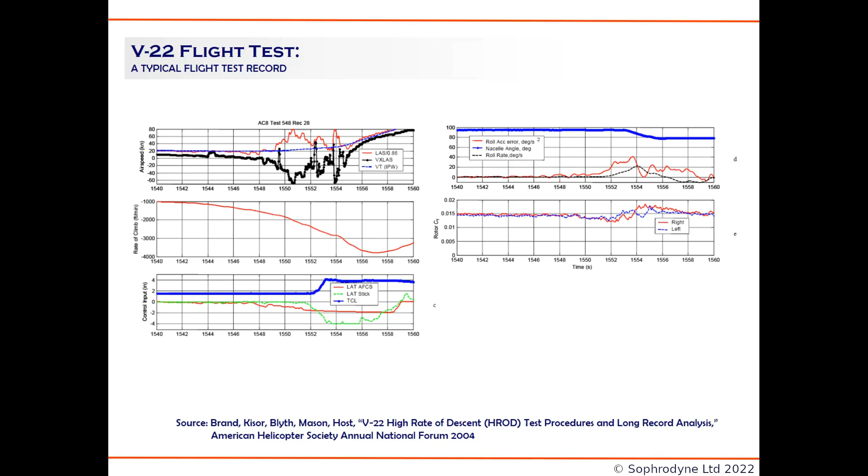As I mentioned earlier, it can be difficult to find an objective measure that one can use practically to infer whether the aircraft is subject to vortex ring state or not. Throughout this presentation, I've generally used the presence of the thrust fluctuations, a la Washizu and Azuma, as such a measure.

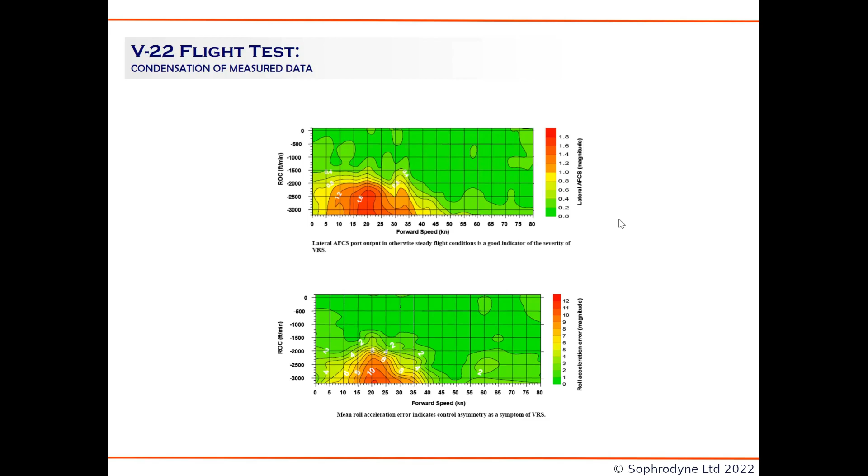And the proof of the pudding in our case was the comparison with our analytic model for the VRS onset boundary, which I'm very pleased to say measured up very well to the flight test data.

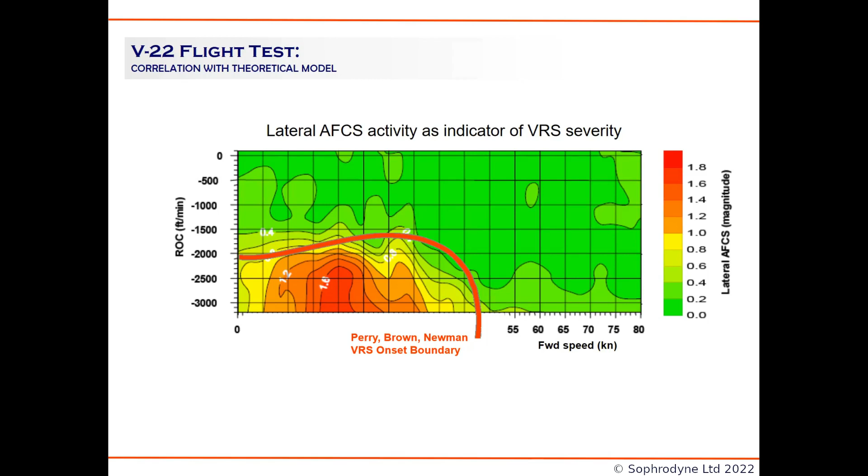And that seems to me to be a very good place to end the story. So let me summarize a few brief conclusions.

What I've shown effectively is that the prime factor influencing the size of the region of the descending flight envelope that is subject to vortex ring conditions is the disk loading of the rotors.

Thinking until quite recently was that this implied that the VRS would only be a problem for large, heavy rotorcraft, and that small, lightweight helicopters would be relatively exempt.

The V-22, in a sense, was a warning that it was possible to escape this paradigm by moving away from the conventional idea of what a conventional helicopter should look like from a design point of view.

And the new generation of aircraft, especially eVTOL aircraft, are very definitely different, being small but having proportionately very high disk loading. This is likely to be problematic if not properly accounted for in the design of these vehicles.

We also know that certain design features exacerbate the VRS by changing the rate at which the instabilities within the rotor wake grow and propagate. And I've argued that these instabilities are essentially responsible for the onset of the vortex ring state. So high blade twist, which is good for propeller performance in forward flight, and certain tip shapes, which may be good for acoustics, need to be treated with some care as far as their properties in vortex ring state are concerned.

And in particular, the presence of multiple closely spaced lifting rotors, and even more so where there's the possibility for mutual interaction of their wakes, may add an extra dimension of complexity to the behavior of the aircraft when in descending flight.

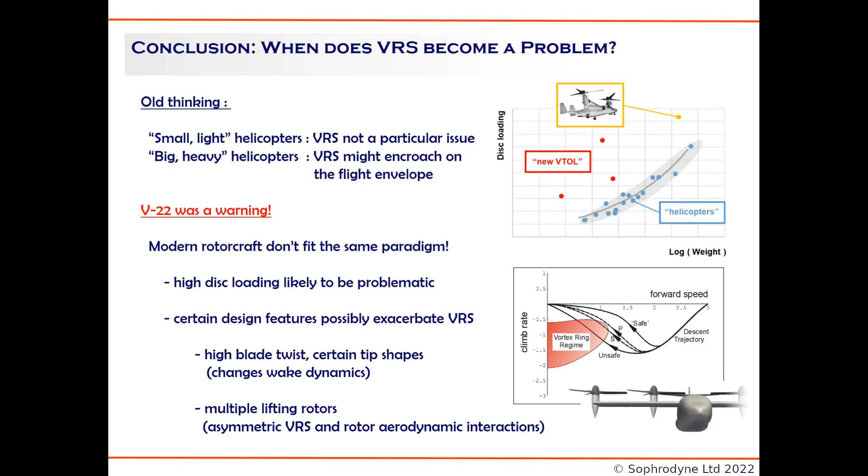So how might we ameliorate the effects of VRS in our new design? Well, we could perhaps tailor our flight path to keeping above and to the right of the VRS onset boundary. This is a good first step, but it does require detailed knowledge of where the VRS boundary is on the flight envelope.

It also requires sufficient margin to account for the effects of atmospheric disturbances and the instrumentation to determine accurately the aircraft's flight speeds and descent rate at low airspeed. For this reason, relying on pilot situational awareness to avoid the vortex ring state is perhaps a little fraught.

Ideally, we need to design the aircraft to be inherently safe. And how do we do that? Well, in my opinion, we do this best by improving our understanding of the operational and design factors that have the greatest bearing on the physics of the phenomenon. And in that vein, we've only begun to scratch the surface.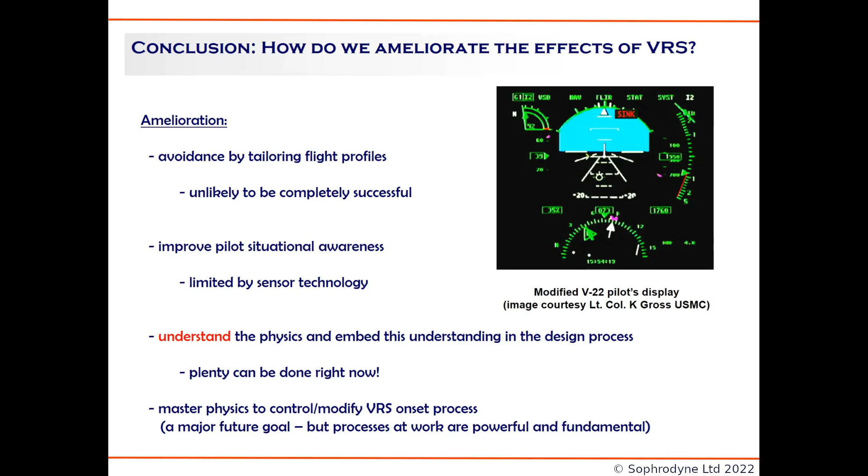So thank you for listening, and I hope that you found what I've said interesting. I've really just given you a taster of this fascinating topic and concentrated very much on how the VRS comes about. I've said a little perhaps about the physics of the rotor once in the vortex ring state, but almost nothing regarding some of the tremendous ongoing work on how to escape the VRS once the wake of the rotor has collapsed. But those are both stories perhaps for another time.